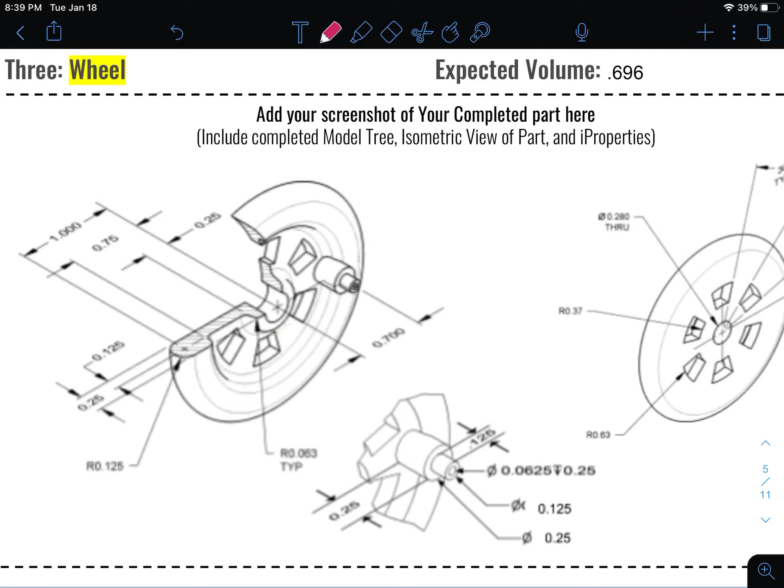Hello, future engineers. In this video, we are going to be drawing part 3, the wheel inside of the train project. We're going to be doing this inside of OnShape. My past two videos on the train body and the stack go a little bit more into the OnShape commands, but you should be able to follow along, and I'm going to point out the important things about using OnShape as we go.

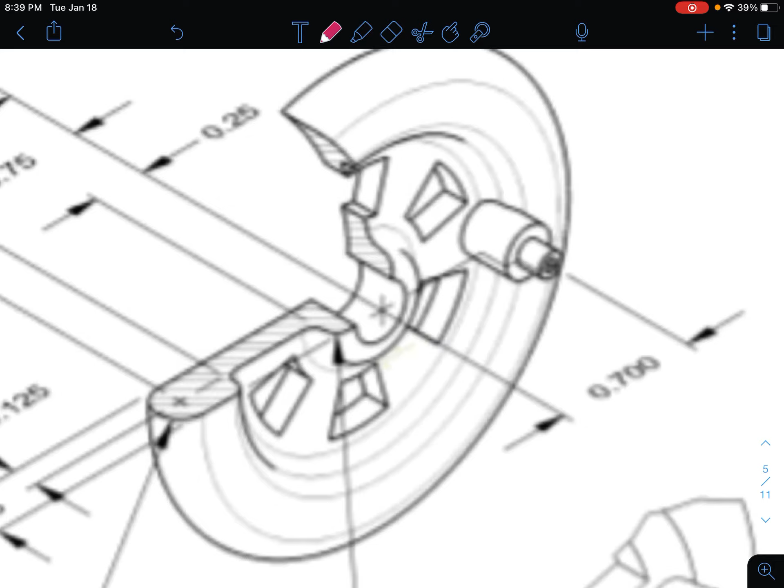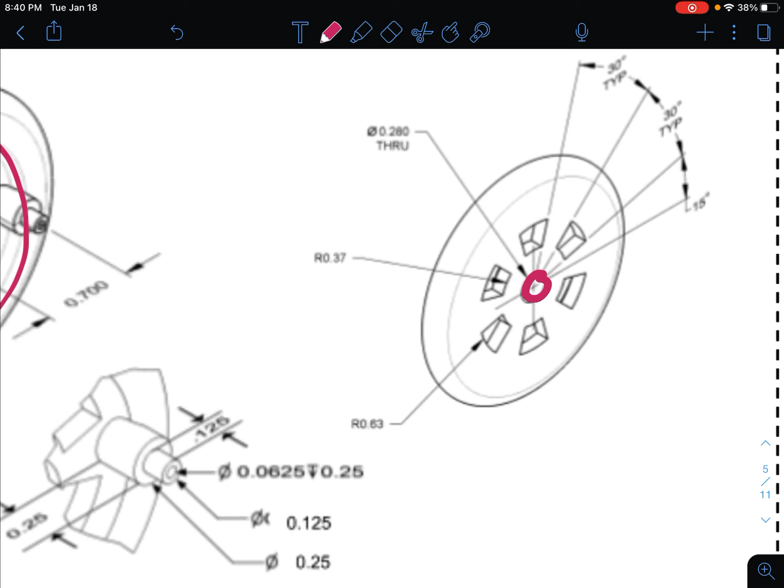So for this one, what we're going to be doing, we are going to draw a pretty simple shape. It's got some rounded edges, goes around right here, and we are going to revolve this again around our center axis so it's extruded in 360 degrees, and then we are going to subtract out this hole, and we'll also subtract out these repeated patterns. And I shouldn't have said finally, because we also will need to add on this component over here.

So I am going to erase some of this just so we can get started and focus in just on creating this face right here.

To start, what I'm going to do is I'm going to take a circle. Let me change this up just a little bit. I'm going to take a circle right over here that has a radius, or a diameter of 0.25, and I'm going to place that 1 inch, or this dimension, from my center axis. So let's start over there.

I'm going to hit create a new document, and this one is just going to be called wheel. Click OK. Now I'm going to hit the pencil icon to start a sketch, and I'm going to choose the top face to start a sketch on.

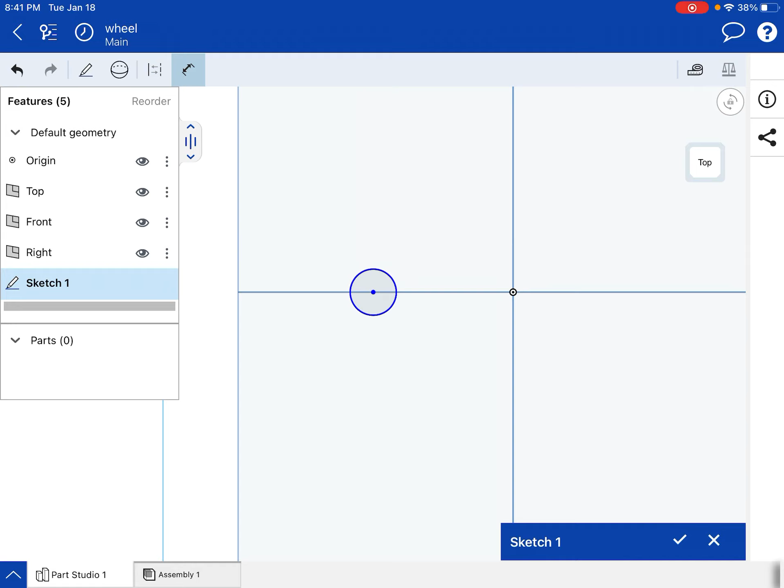2-finger touch on the screen to view normal to plane, and now I'm going to take a circle and draw it around that axis and give this a dimension. Back into the sketching tools, choose dimension, and I want to just click on the circle over there, tap once, and this should have a diameter of 0.25.

I'm again going to 2-finger tap just to view normal to the sketch plane. It's off from the center. I still have my dimension tool, so I'm going to select the origin, and I'm going to press and hold so I can select the center, and this should be a distance of 1.

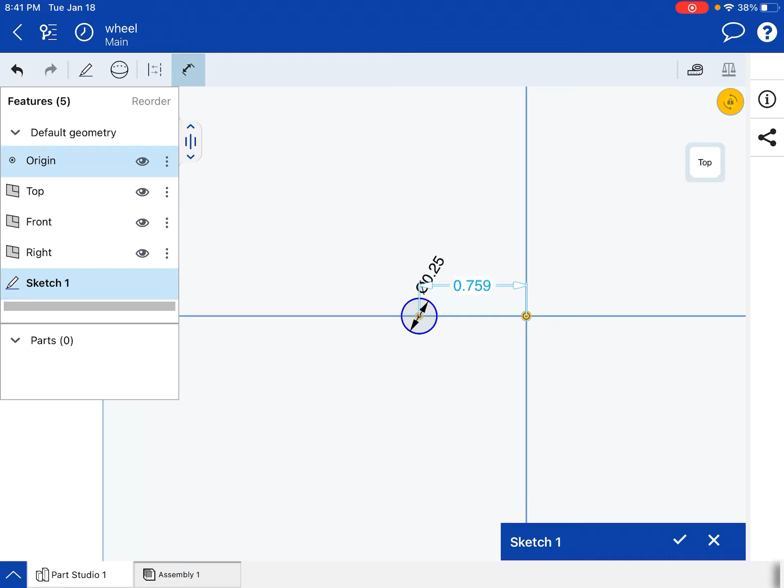Cool. Let's go and double check what we need to do next. We can just draw and connect our lines over here, but we're going to need to eventually draw in our edges that are going to be defined by these over here before we start adding some radii to that.

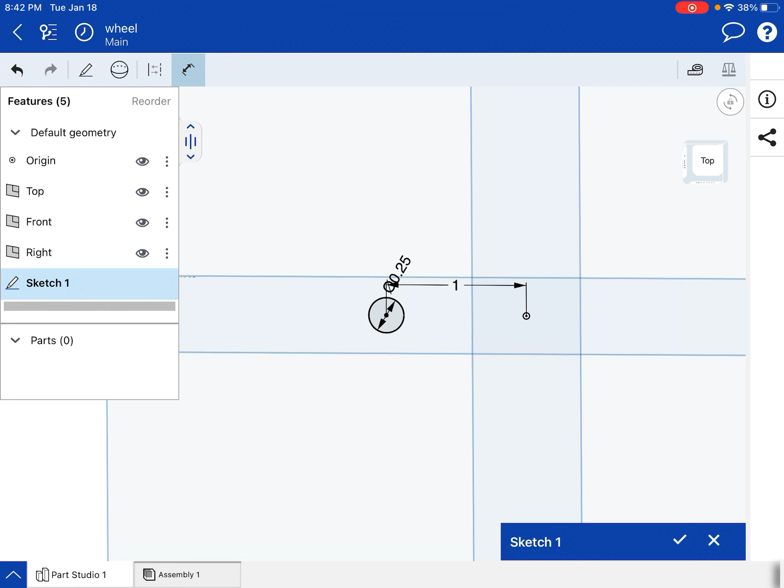Cool. So, gotta do the 2-finger touch to view normal again. Let's go and grab our line tool. For this one, I'm going to start at the edge over here and just draw a line back. Then draw this up and across over here.

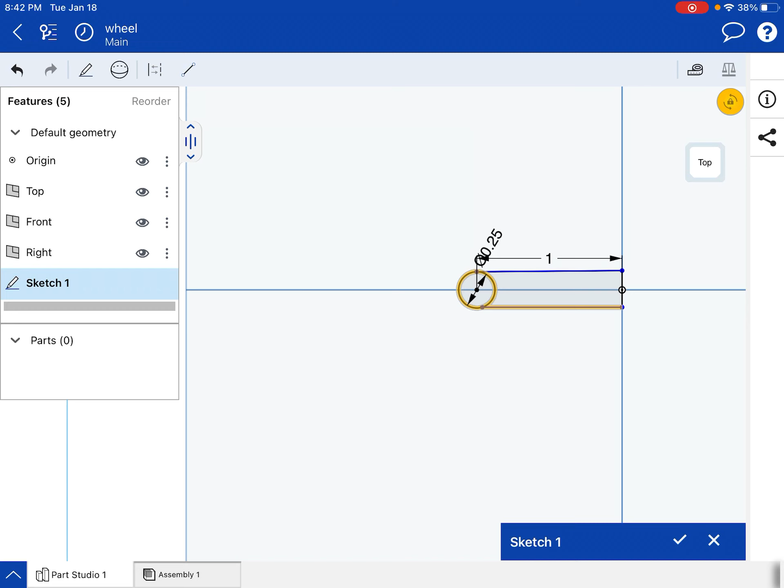Cool. Let's get into some constraints to really get this right. One, we're going to start with our tangent constraint, and I'm now just remembering that in Onshape you have to select the lines that you want first. So I'm going to select that line and make sure that those are tangent.

Do the same thing over here. So select the line and the circular surface and hit tangent. That one might need another dimension. Let's make them parallel between these two lines. We'll make those parallel. Cool.

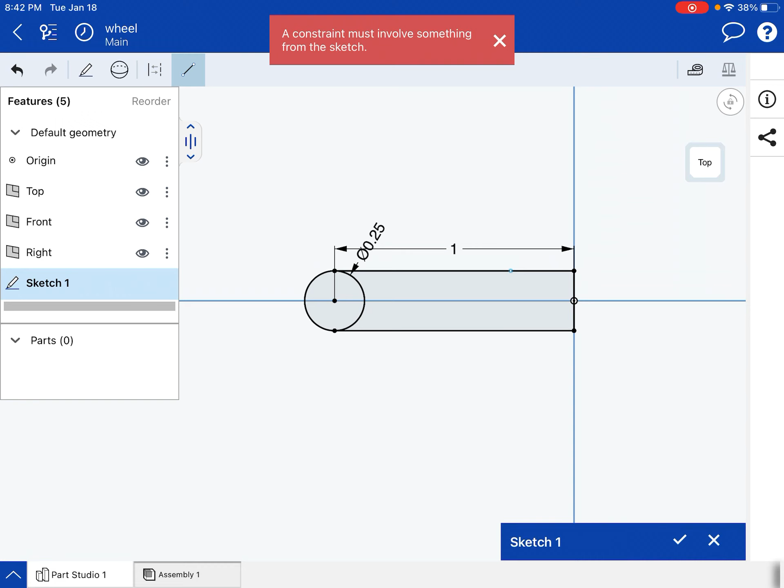And now we are fully constrained, but we wanted to add in some lines. I'm going to draw in 2 lines spaced out over here. Oop, I do not want to do that one. We'll grab the line tool again. Cool.

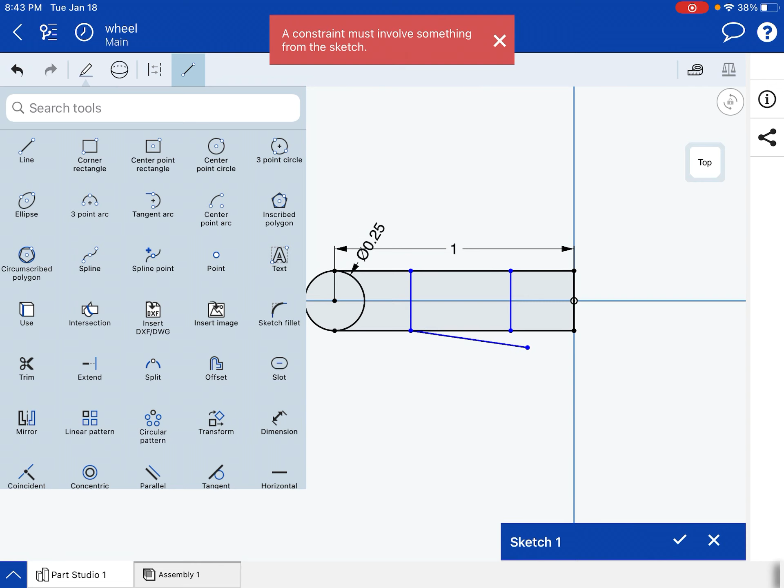And these lines, we have a distance. The first one from the center, if I recall correctly, is a distance. Select the line tool, gosh dang it, or the dimension tool. There we go. All right, so that line to our center axis, that should be a distance of 0.25. And then again, this line to our center axis should be a distance of 0.75.

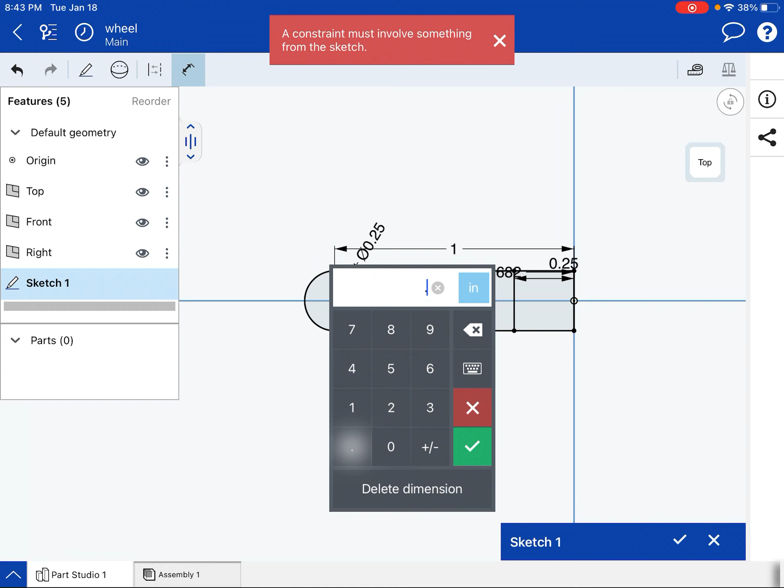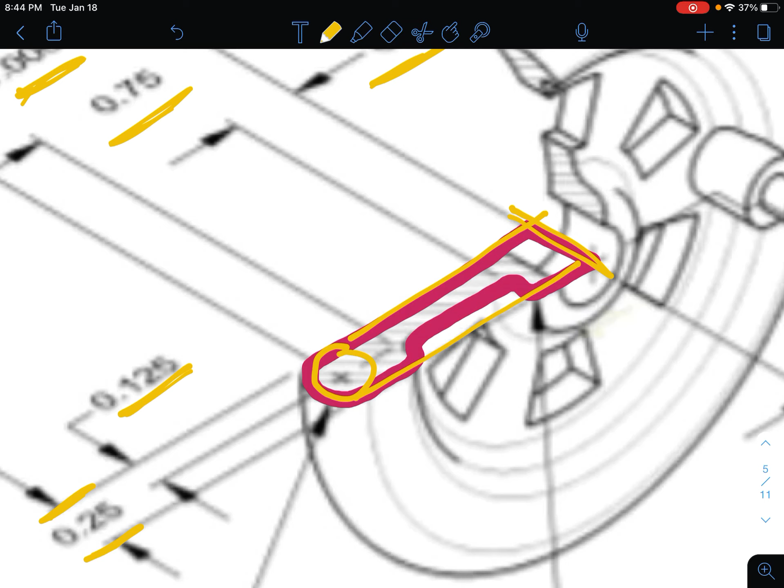0.750. Cool. I'm going to grab my line tool, and because I know this is directly along the center, I can draw a line straight across right here. It grabs the dimensions. You can see it's fully constrained. That is this dimension right here, the 0.125, 1/8 of an inch, which is half of the thickness or diameter of the circle that we drew. That's creating this line right over here.

Cool. So now let's get back in here and we can trim up the parts that we don't need. I'm going to go into my sketching tools, grab my trim command and trim out just by tapping on the parts of the lines I don't want.

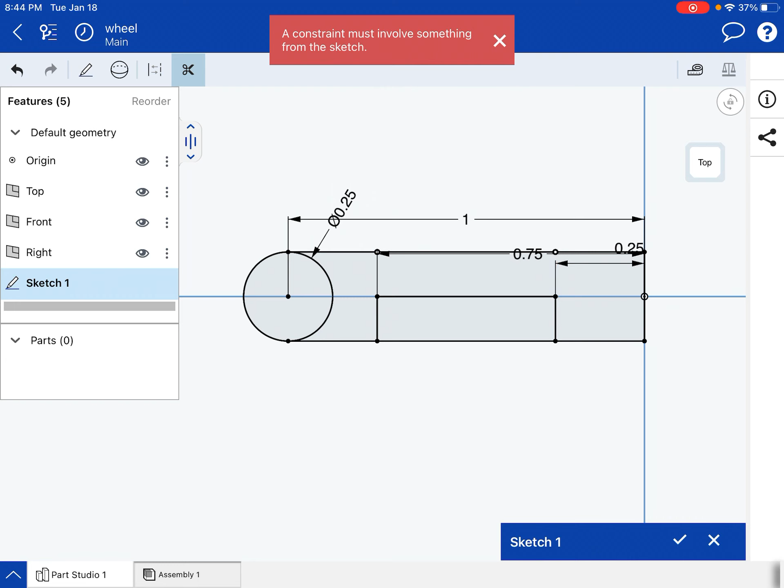And that circle feature over there. Cool, so we can add our radius. That is that general radius dimension, right here. A radius typical of 0.063. That's what the schematic says. I know that's very blurry.

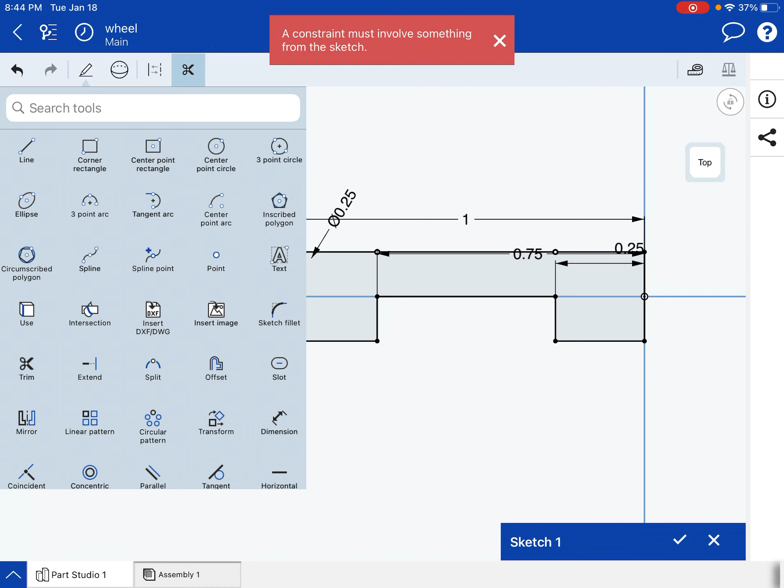But that is the dimension that we need. We can add it in 2D or 3D, it doesn't matter. I'm going to add it in 2D over here. I'm going to go into my dimension tools and grab sketch fillet. I need to just get rid of that. Click on these two. Let's see, it's been a while since I've used the fillet command here.

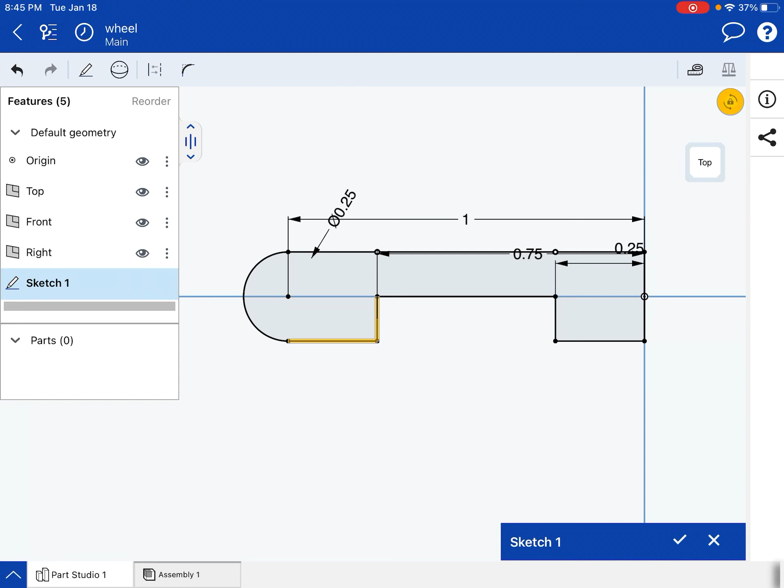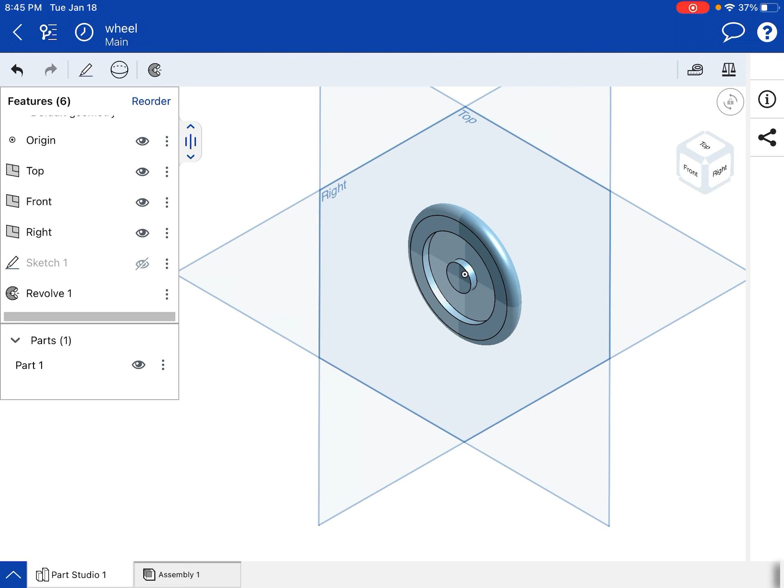All right, we'll do it in 3D. I'm going to finish that sketch, go to my extrude tool, choose revolve, choose this face, scroll down so I can select the axis. That axis is going to be this center point over here. Click the check mark, do a two-finger touch so I can view the isometric.

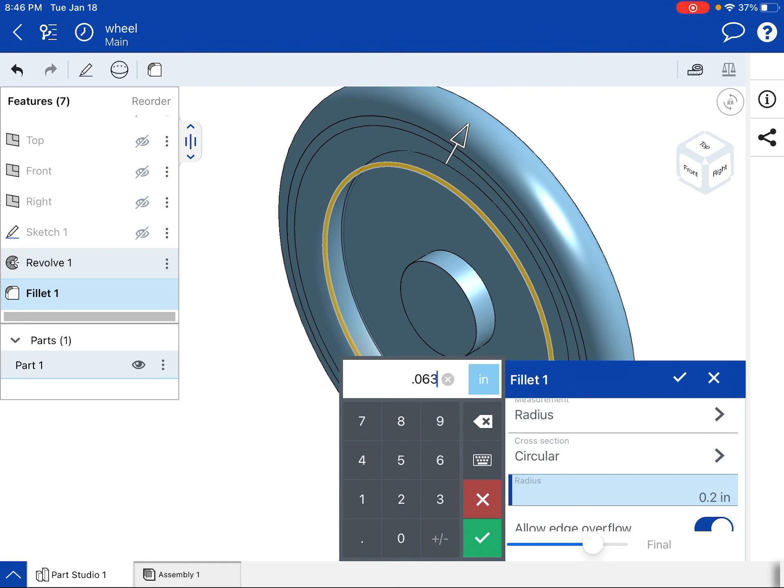And I'm going to turn off all my planes and origins by hitting the eyeballs because we don't need them anymore. Now let's see if we can do that fillet inside of the 3D space, that might be a little bit easier. So I choose the 3D commands, go over to fillet, choose this edge. That radius is way too big, 0.0625, actually it's 0.063. Cool, we're going to select that.

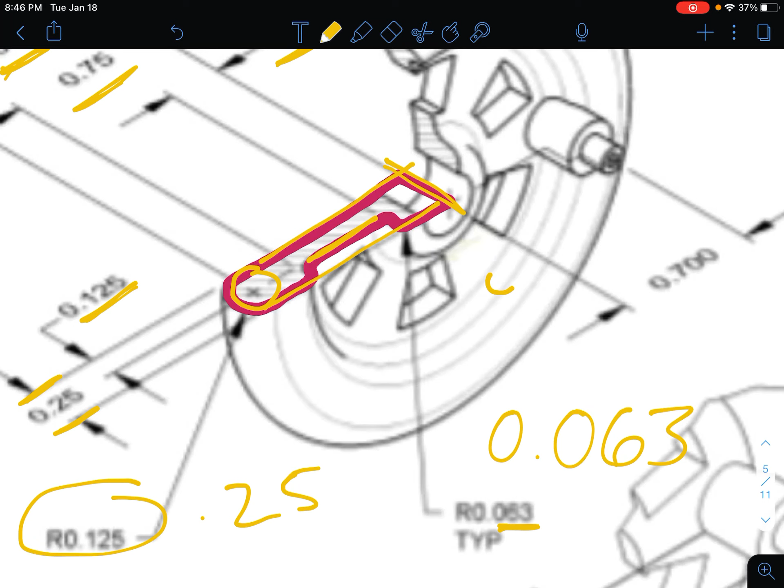This also needs that fillet, I believe. This needs that fillet, and this needs that fillet. Nope, it's not going to let us do those. Let's double check what fillets we need. Yeah, it looks like we have the 0.0625 fillet of 0.063 over here and over there. Looks like all those are filleted.

I'm going to erase this just so we can see a little bit better. Yeah, those are all rounded. Maybe I punched it in wrong, maybe I made the fillet too big. Let's see, go back into the wheel. 3D model commands, do our fillet tool.

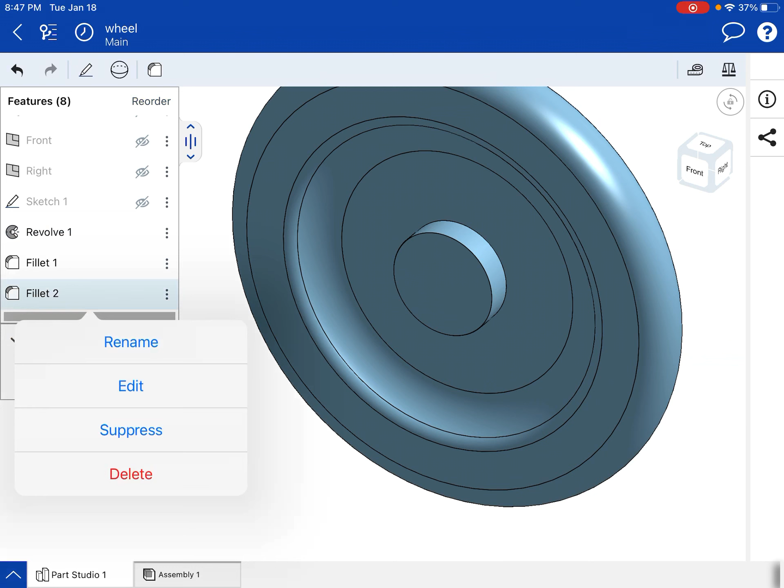Choose this edge over here, again 0.063. The green check, I'm going to finish that fillet and then choose another fillet. There we go, now it's working. I just have to do them one at a time. Unless it automatically defaults to that 0.2 - it does, that's why we're getting those errors.

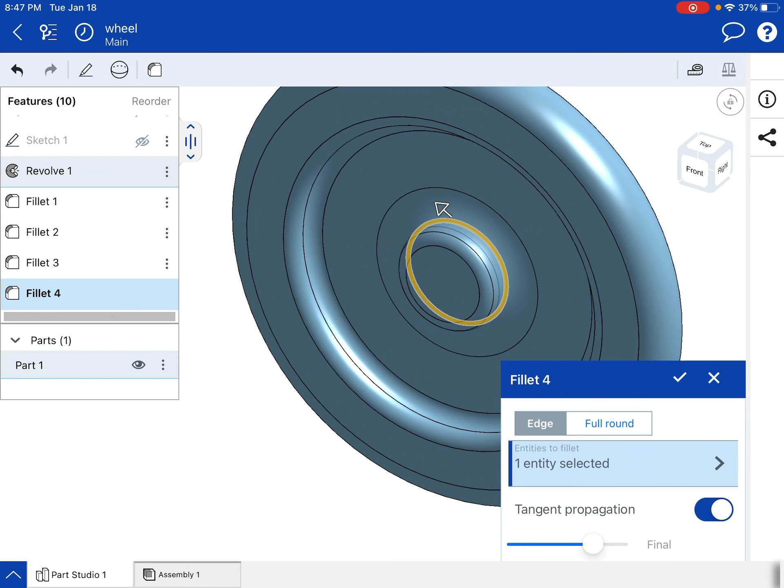0.63. Cool, I'm going to grab this one. 0.063. Grab the fillet command one last time, do the 0.063. All right, cool, so now we have this rounded wheel.

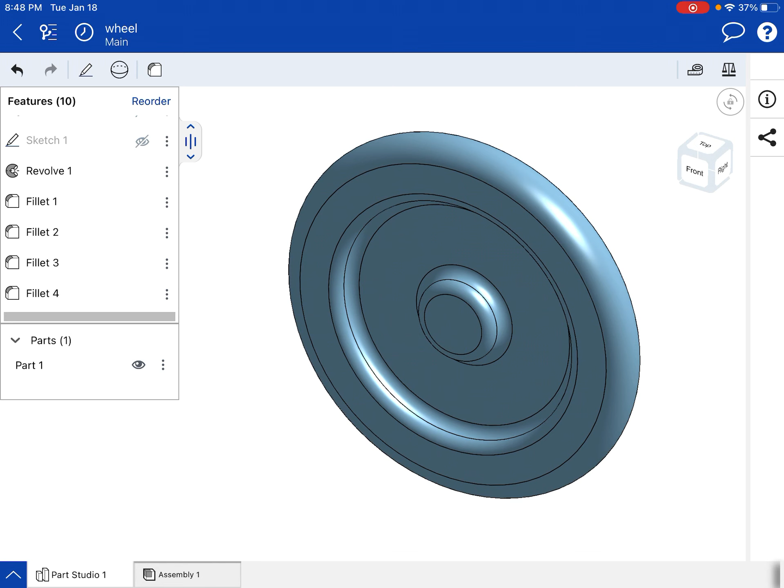I know that was a little confusing, but we just want to grab the edge that we want, choose fillet, and then make sure that it is set to that 0.063. So we should have 4 fillets applied to the wheel. Now what we're going to do, we're going to hit our Start 2D sketch, and we're going to draw a sketch right on this face over here.

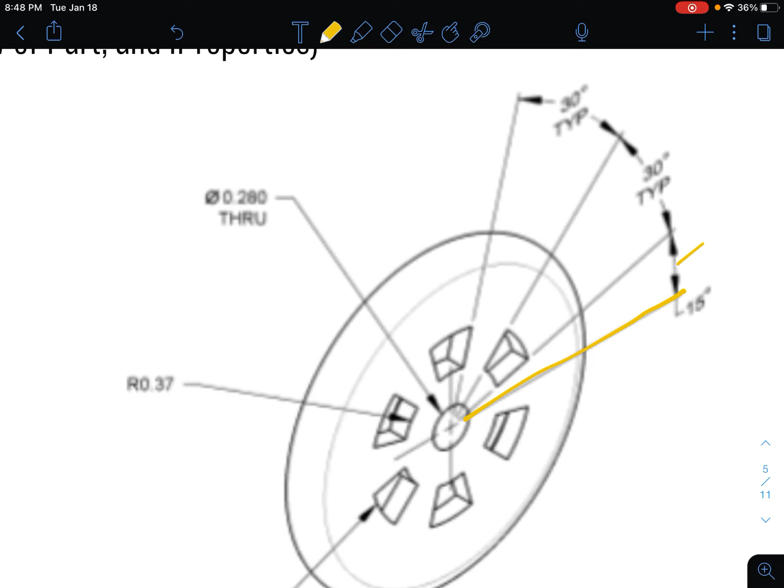I'm going to do a two-finger touch to view normal to the plane. Now what we have is this kind of angled face over here. You can see that the first line, we're going to draw some reference lines. This line is going to be 15 degrees, or 15 degrees between this line over here, then 30 degrees and 30 degrees. We're going to draw all those lines in, and then we'll draw in this circle and these radii over here.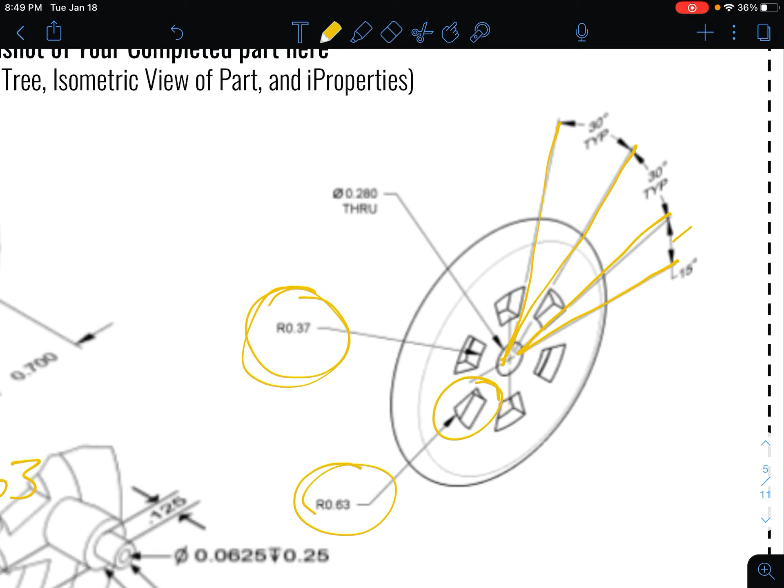Or actually, no, we're not drawing in this circle. Erase this. We're drawing in this radii and this radii so that we can create this shape and then repeat it a bunch. So let's go over here, back to the wheel. I've made a sketch, there we go, sketch 2. Let's edit this sketch and view normal to sketch plane.

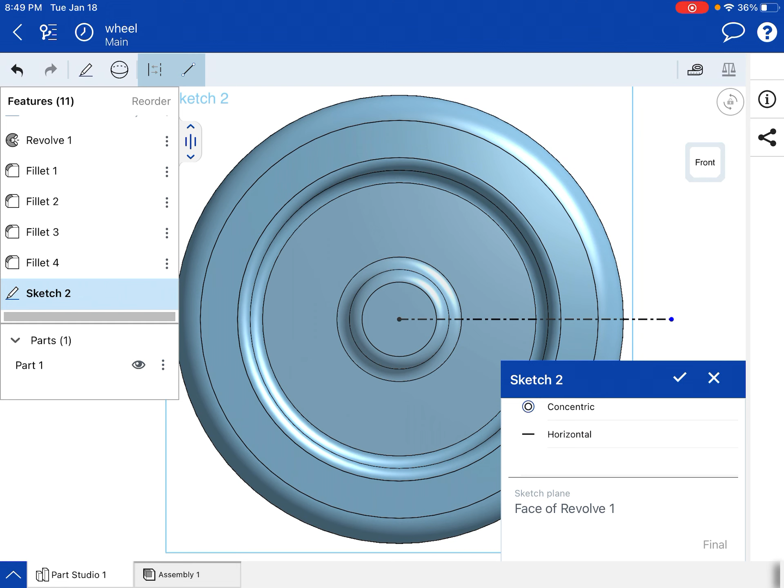Cool, I'm going to go over to my lines, and I'm going to turn this one into a construction line. I'm going to start this right at the center, and draw this straight out over here. Cool, that's going to be our reference, so that's where we can make that 15 degrees.

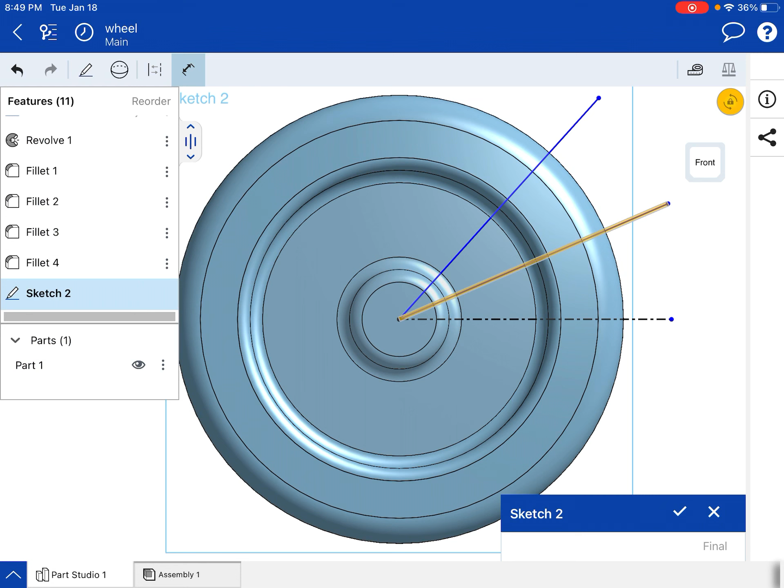Our next lines, I turned off construction, and I am going to draw in a line over here. Stop chaining them together, grab another line, draw this one up over here. Cool, now inside of my dimensions, it's not important the distance or the length of the lines, what is important is the angle. So this one should be 15 degrees, and then our distance between these two lines, this should be 30 degrees. Cool, that gives us some solid lines.

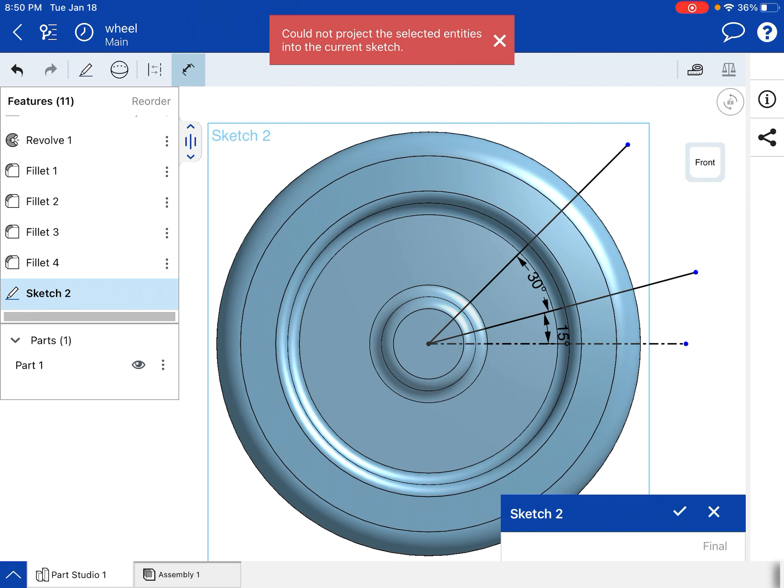You can see that their endpoints are still blue and undefined because we have the angle, but we don't have the location of that endpoint, but we never need that, which is pretty cool.

So now let's go into our sketch commands. We're going to take a circle with a center point and draw out a circle right here. This circle, if we look at this, is a smaller circular dimension. It's got a 0.37 for its radius, so we're going to double that for its diameter and draw that circle. I'm also going to draw the other circle while I have my circle command, trying to offset it so it's not on other lines.

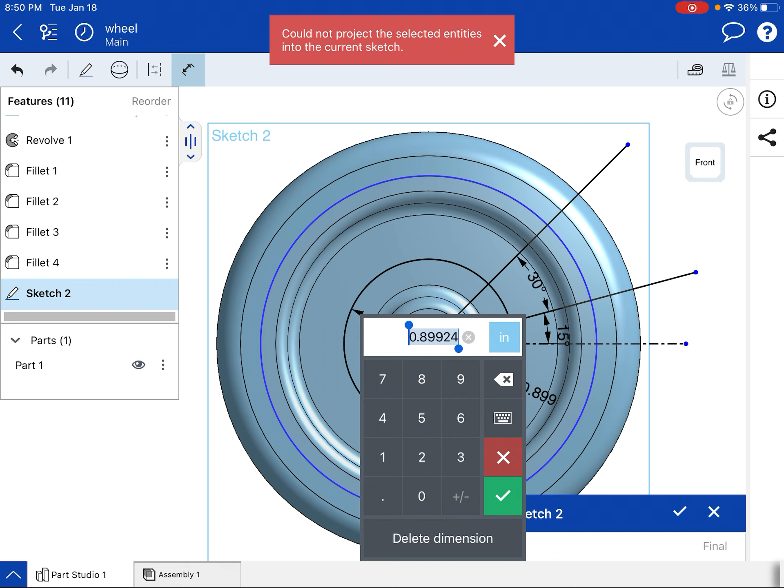Cool, we're going to draw in our dimension. So this one had that radius of 0.37. I want to point out, you can go into the keyboard and type in 0.37 multiplied by 2 and throw that in. We get 0.74. We can do the same thing over here: select that line, go over to the diameter. Let's double check, this is 0.63, so if we double that, that's 1.26.

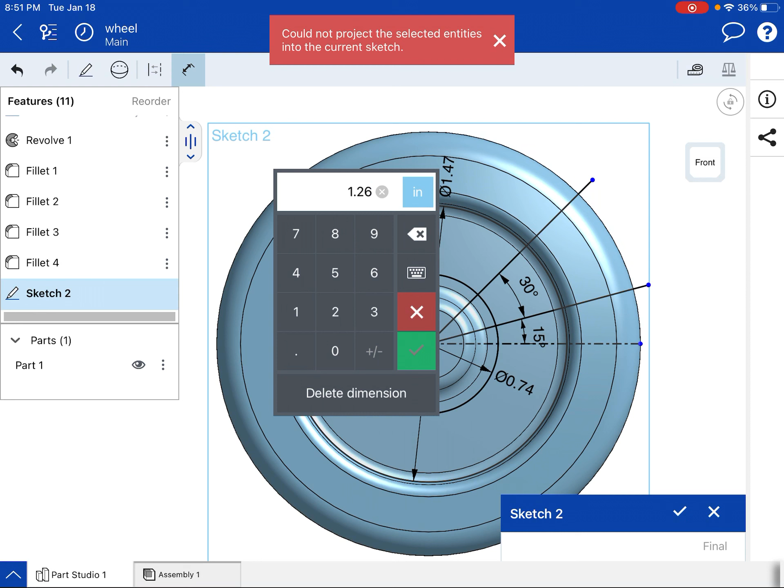Now all that I actually need is that little pizza slice shape, so I'm going to grab my trim tool and trim out the parts of the lines that I do not need. Cool, so now I just have this floating shape right here.

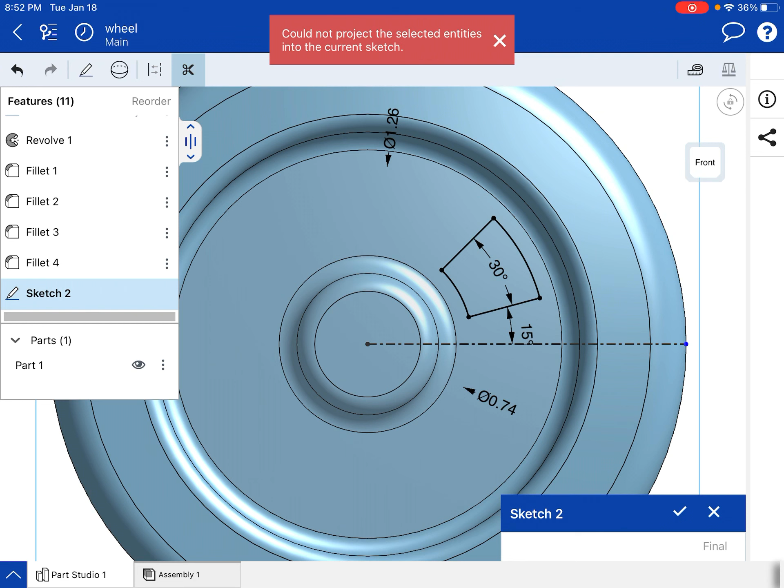What I'm going to do is, let's see, what's easier, a repeat inside of the sketch? Yeah, we got a circular pattern right here, why not, let's do that. We'll repeat it inside of the sketch and extrude it all as one sketch. So we're going to choose circular pattern, and with that, we need to select entities first.

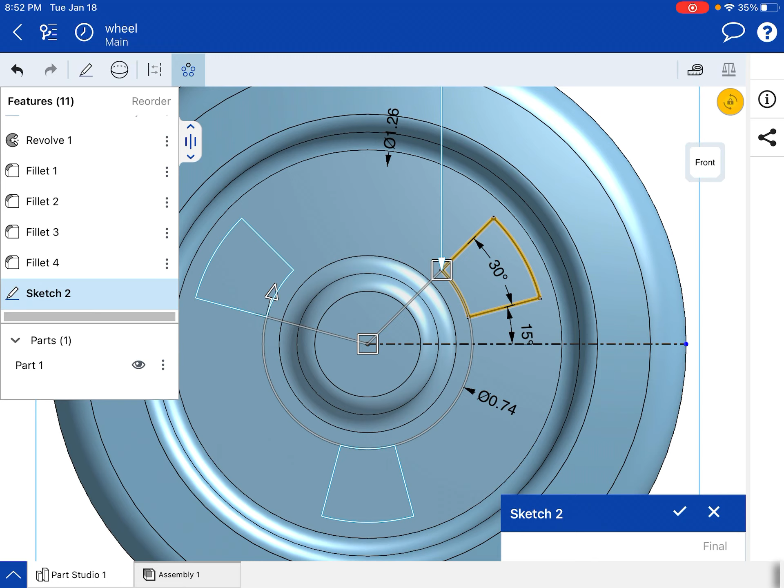So I'm going to go and select all the lines that I have over here. Oh, it's already doing the circular pattern, that's pretty cool. Where can I make the difference with them? Oh I see, okay, so once I have all those lines selected, I've got this 3 over here. We want 6 of them, and they're going to be equally spaced, so I'm going to hit the green check. And there we go, we've got 6 of these repeated objects.

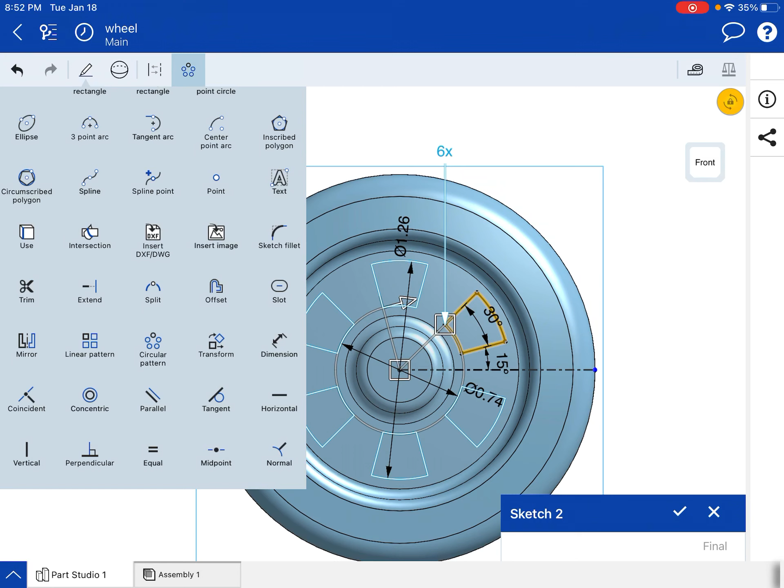So what I had to do was go into my sketch tools, select that circular pattern option over here, select the feature that I wanted to pattern, which were those lines that I created, and then change up here whatever number I wanted it to be. So I wanted 6 of them. Oh, did I accidentally just change something?

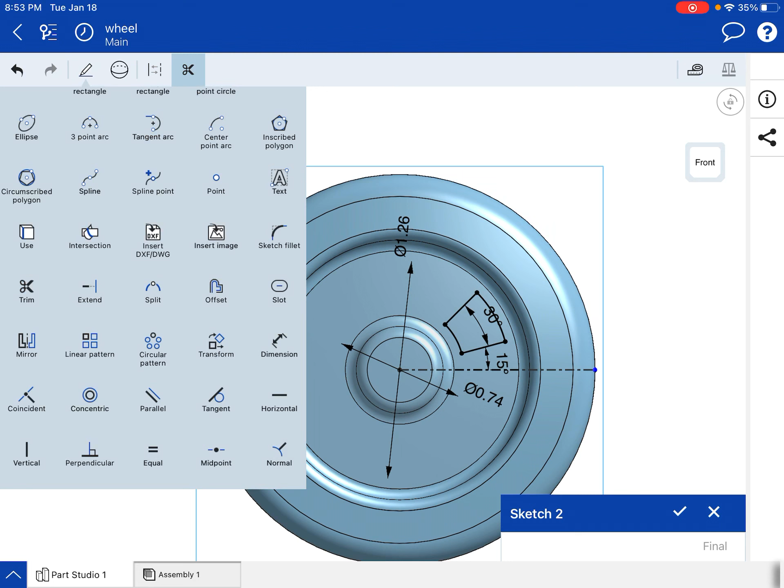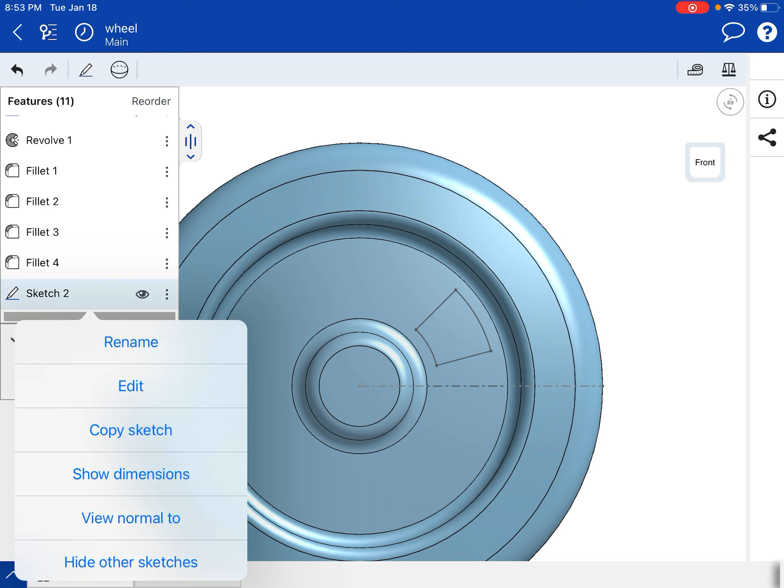I did, I'm going to go back, we'll do it again anyways. So I'm going to hit trim, grab out that last part of the line that I don't need, and then go over to that circular pattern. I have to select the entities that I want and then change this. Come on, I want to select that line. Nope, select that line, there we go. I want to change this to 6, hit the green check, check that. Nope, it didn't do it. Oh boy, didn't want this to be as long of a video as it was going to be. Alright, let's try this one last time.

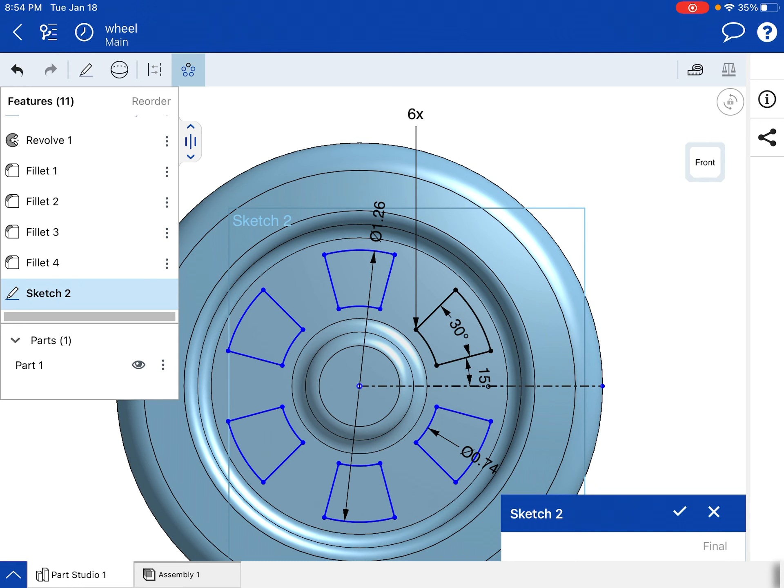Alright, circular pattern, 6 of them, check, just tap off to the side. There we go, perfect. They're going to be blue, they're unconstrained, I'm unconcerned with that. We're going to hit our check to finish this sketch.

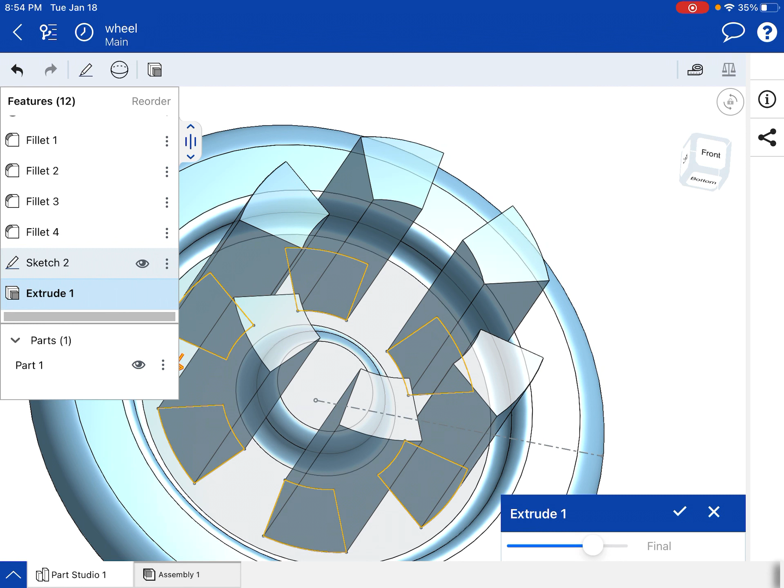Then I'm going to go back to my isometric view and hit my 3D commands so I can extrude all of those faces. I'm going to choose all of the faces that I want to extrude over here, drag them through, and change our operation from add to remove, and we'll hit our check. Then I'm going to go back to my isometric view. Wow, look at that, we are so close.

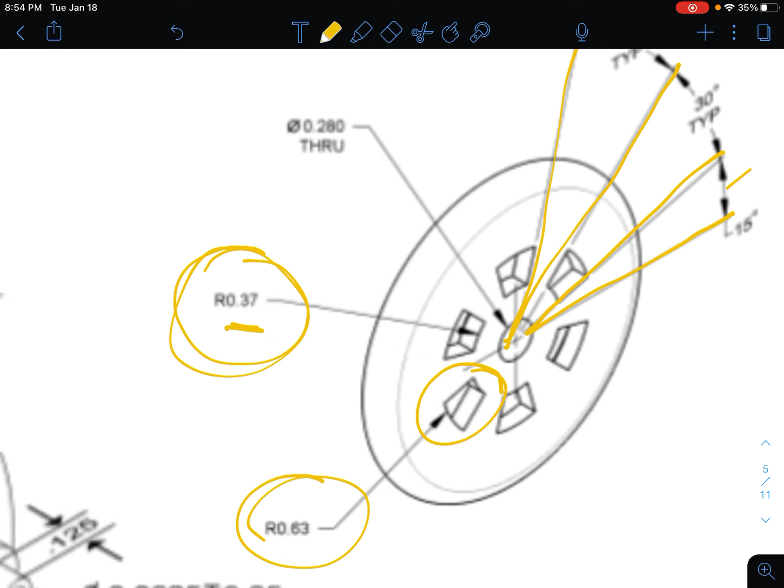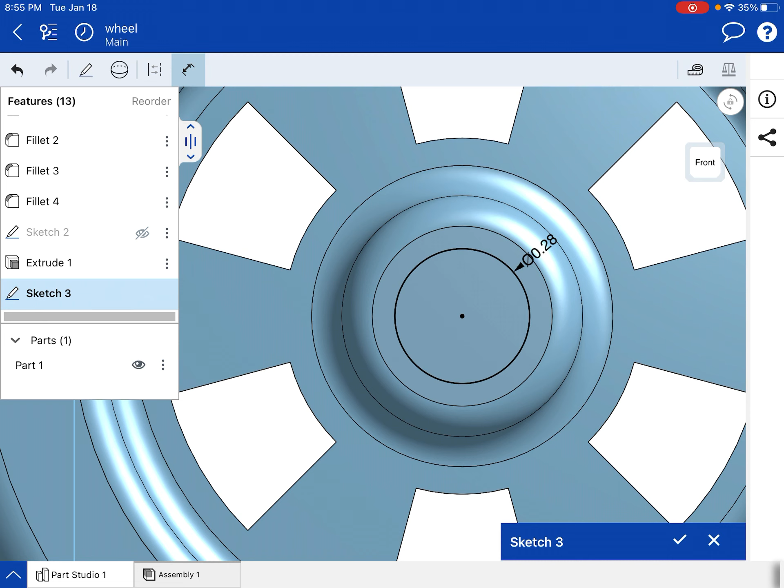Alright, let's draw that hole in the center. That hole in the center is a 0.28 through hole, so we're going to go over to Onshape, choose my sketch command, choose this face to draw on. I'm going to view normal and grab a circle with a center point, draw that out, grab my dimension, choose that—oop, didn't want to choose that, wanted to choose, oh boy I'm rushing it. Go to the center, drag this out, go over to dimension, choose this outside edge, choose the numbers and do 0.28. We'll finish sketch, choose my extrude, click go over here.

We're going to change this to remove and end type blind.

That's totally fine, the opposite direction, 1 inch is going to be more than enough to extrude all the way through. So the last thing that we need to do is add on this guy over here.

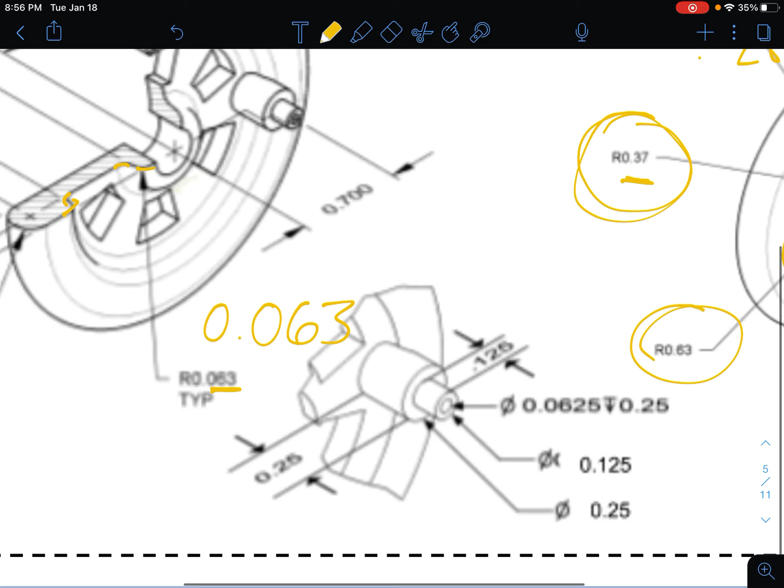This circle is located 0.7 from our center. So we're going to start a sketch and draw a circle that is 0.7, dimension it, and then we can draw in this extrusion over here.

So I am going to go back to my drawing, and I need to figure out where to start this sketch. Oh, it extrudes out from the surface, so I'm just going to start it on that surface. We'll start a 2D sketch, choose this surface, view normal, and grab my circle.

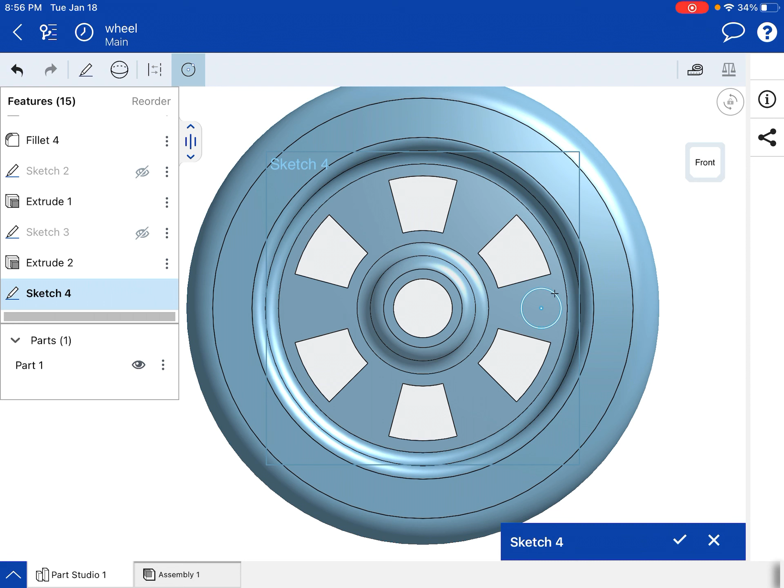I'm going to place a circle along this axis over here. I'm going to try and have it not snap to anything. Then let's throw in a dimension, its distance from its center point to our center over here.

I'm going to hover over. Oh, it's not going to allow me to choose that. I'll turn on the origin again. There we go, so I just scrolled up and hit the eye next to the origin so that I can have a reference to dimension to.

There we go, this distance... come on. Let me edit that distance. Shoot. This is a rough tutorial. Oh well.

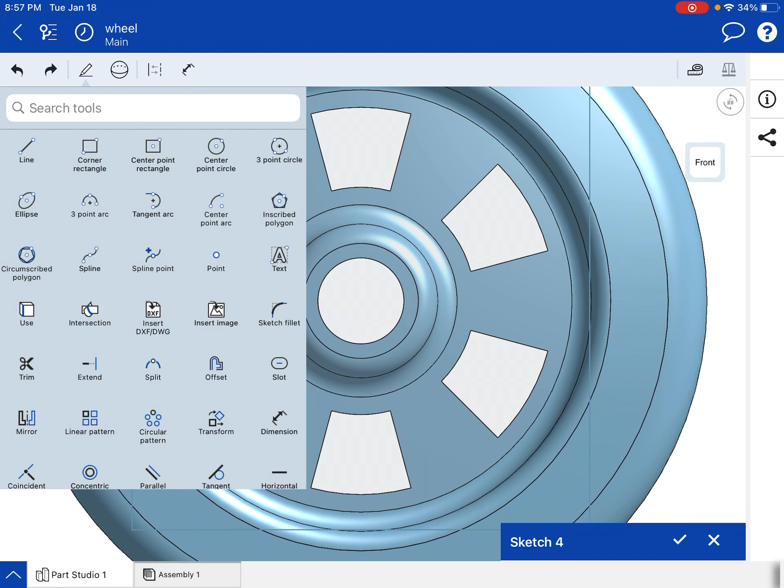Center point, drag it along over here, make sure not to snap to anything. That looks better. We're going to grab our dimension tool, go from the center over here, turn on my origin so I can reference that. It should be a distance of 0.7 from the origin.

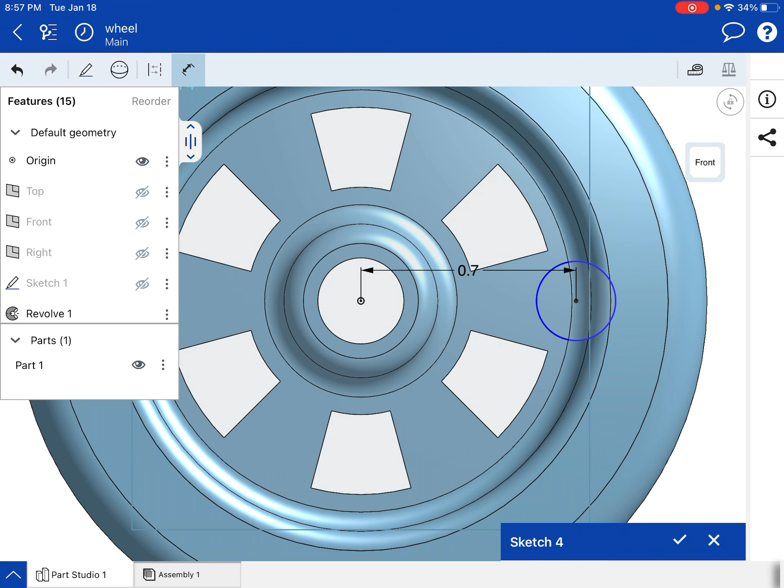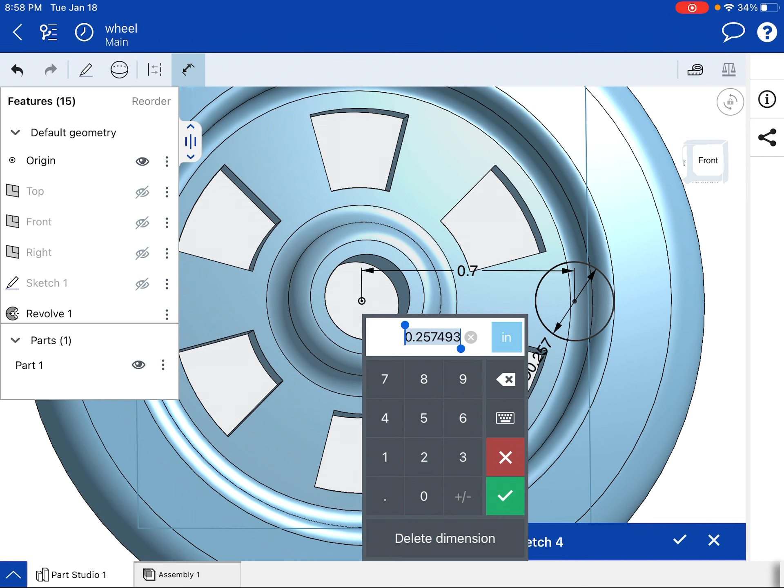Cool, and now let's throw in the dimension, the diameter of this hole over here. That should be, or that, not a hole necessarily, that should be 0.25. So let's choose that, 0.25. I'm going to finish sketch, go back to my isometric, and extrude that face that I just created, not that one.

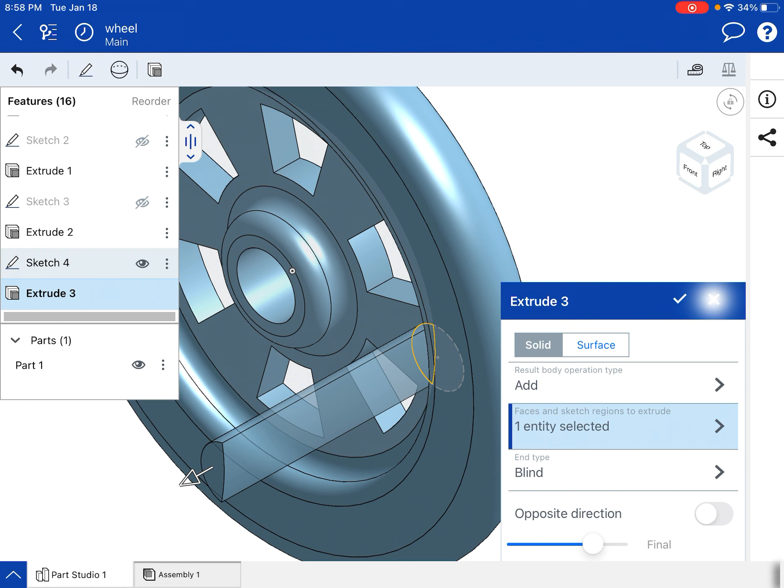Extrude, hover over. It's only letting me select one of them because it's hidden. Oh, you punk OnShape, you. Let me go to view normal.

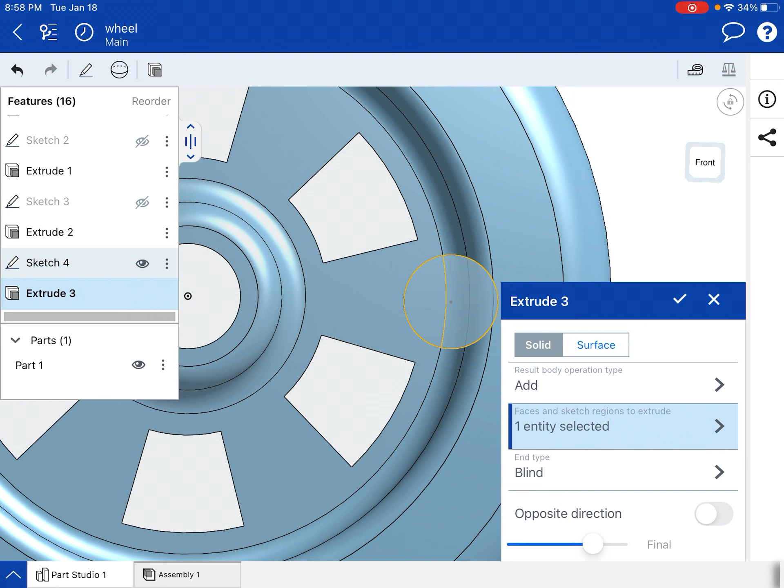All right, let's see if we can go to extrusion, and we're going to choose extrude, and I'm going to go and choose sketch 4. Is that going to allow me to do it? Go over to my isometric view. Yeah, that's how we're going to do it. All right, so how we figure it out.

We choose our extrude command, that's this guy up here. And when we have that selected, we go to our model tree over here and choose sketch 4, and it's going to allow us to select the whole thing. That is going to be extruded out a distance of 0.25, so our depth is 0.25. Finish that up and hit check.

Go back to isometric. I was at isometric. I'm going to start a sketch on this face over here, go view normal to plane. Let's grab a circle again, starting at the center over here, and drag that out. Now we're going to dimension this guy right over here.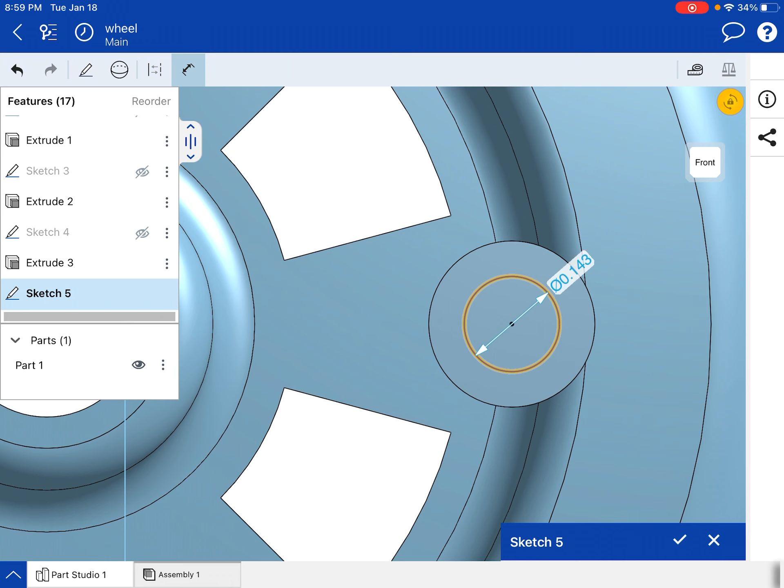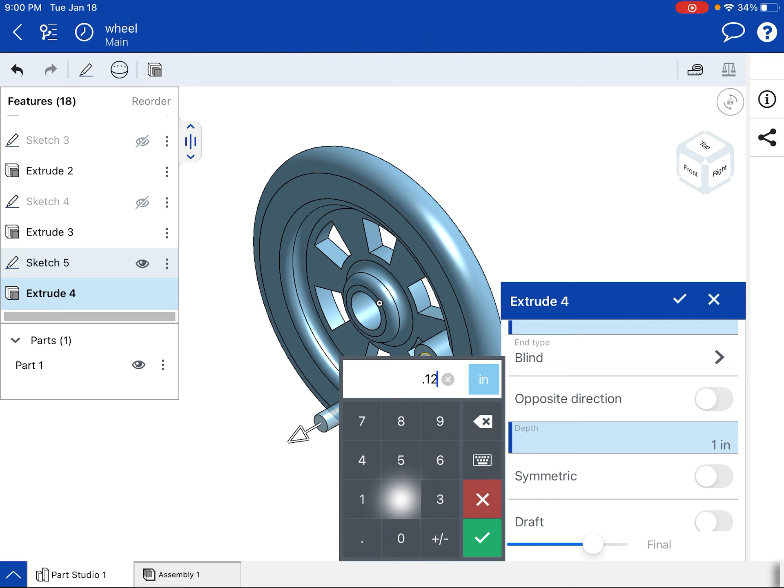This should be 0.125. Then go to my isometric view so that when I finish this and hit extrude, I'm going to do the same thing and just select sketch 5. This one we do not want to extrude a depth of 1 inch, we're doing 0.125. We'll click the check.

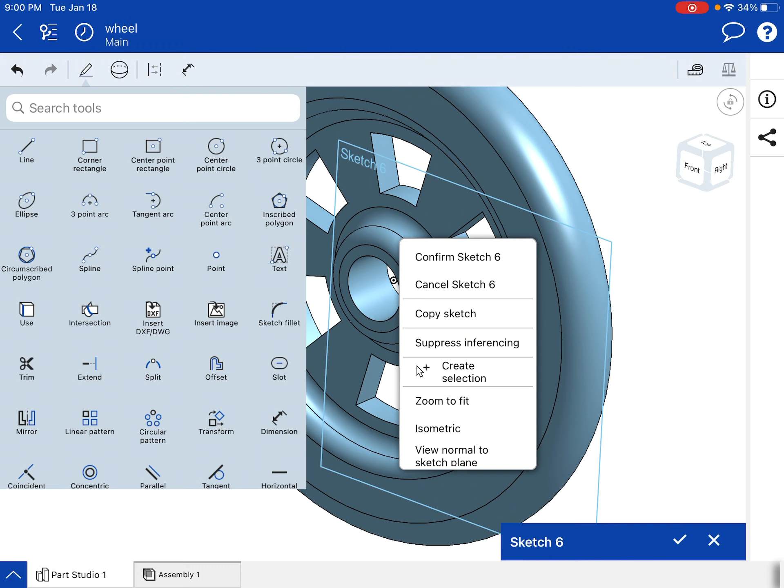And now we have to add this hole that is 0.0625 and has a depth of 0.25. So let's do one last sketch, right here on the center, view normal to sketch plane, and grab my circle with a center point.

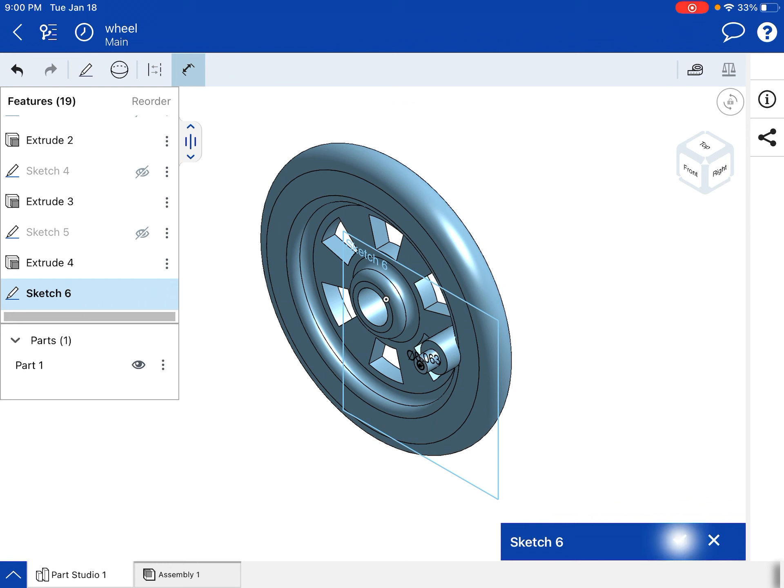Start over here, drag this out. We're going to choose dimension, and dimension this line at 0.0625. Check. Go back to my isometric view, hit the check mark, and extrude sketch 6.

This time we are choosing to remove, and we want our depth to be a distance of 0.25. Throw that in, hit the check, and let's see how we did.

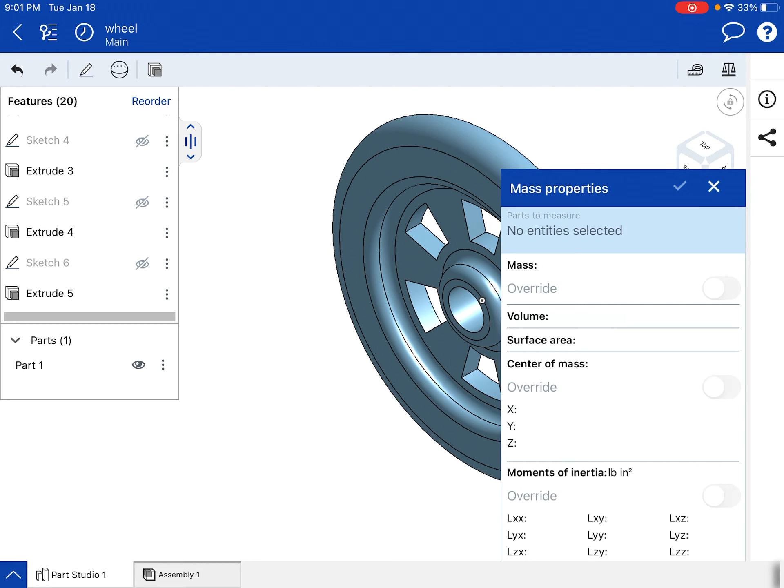We're going to go over to volume, and we're going to choose part 1. We got 0.696. If I go over here, our expected dimension is 0.696.

I know that one was a little rough. There were some OnShape commands that I didn't think worked that way, they didn't work the same as Inventor, but we're able to figure them out. 3D modeling softwares are so similar to each other that once you learn one, you know about 90% of the others, so I'm glad you're getting this experience.